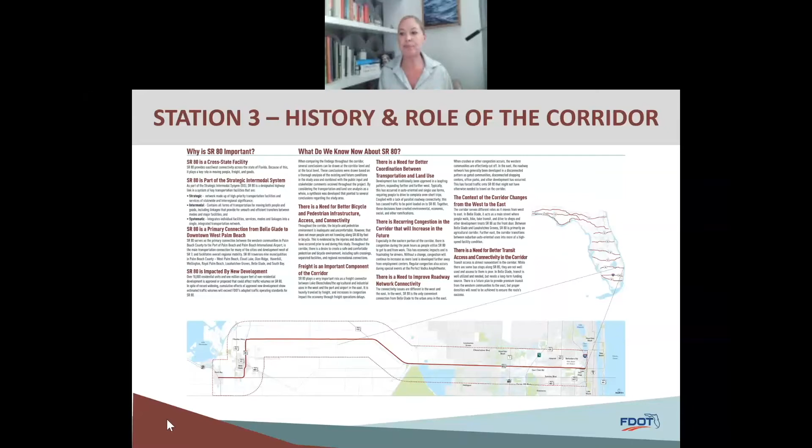So as I was saying, with this being such an important corridor, there historically has been much investment placed on State Road 80. You can see here the extreme makeover. I thought that was really clever marketing for Southern Boulevard. So you can see hundreds of millions of dollars of improvements have been invested since 2005.

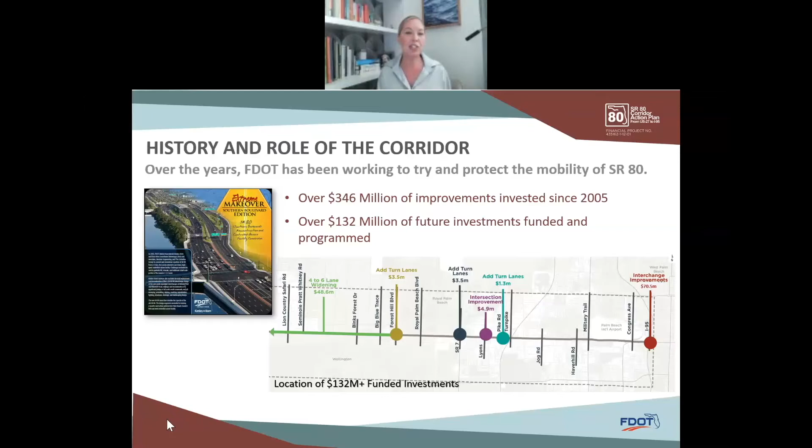There's continuing to be investment made on the corridor outside this study and from this study. So as you can see on the graph below, from I-95 all the way west past Lion Country Safari, there's been investment, as well as over in the Belle Glade area.

So I had mentioned the land use component of State Road 80. This was quite a challenging component of this study because development tends to be all about timing—when you can assume the development in your future forecasts, and also what the development program is. In other words, how many square feet of commercial or how many residential units. For those that aren't familiar, you have to identify all of those specifics so you can incorporate the traffic into your future analysis years to ensure you're properly analyzing what State Road 80 is going to need to accommodate in terms of moving cars and people over time.

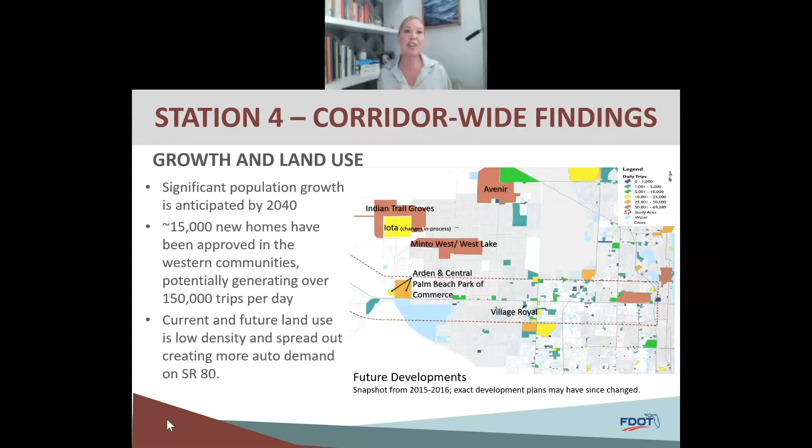For this particular area, you can see it's potentially generating over 150,000 trips per day along the corridor, which is a lot. This was a very big concern to the Department of Transportation, given the importance of this corridor throughout the state to serve and not only move people, but to move goods.

Also, from a land use perspective, we looked at characteristics. You can imagine from Belle Glade to downtown West Palm, those are very different makeups in terms of the land use, the density, the demographics. And in planning, it's so important not to do a cookie cutter approach or one silver bullet solution to all 45 miles. So to make sure the team did not do that, we broke it up into segments, looking at different characteristics. This is now considered and called context classification.

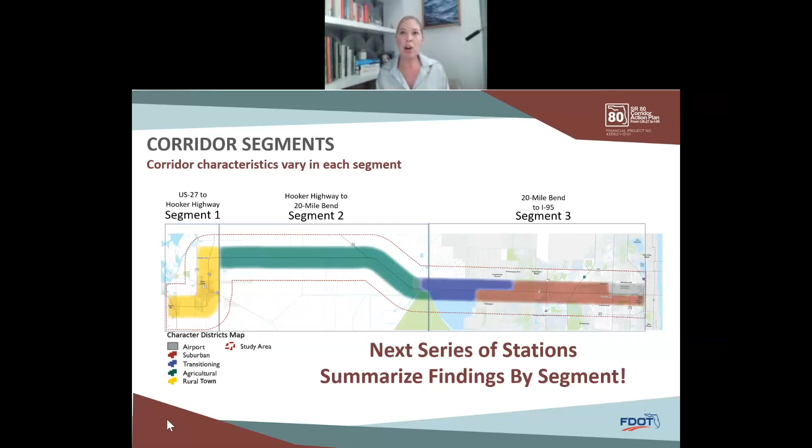So I'm going to walk you through the three segments and our findings for State Road 80. Starting on the west in Belle Glade is segment 1. Personally, this was a very rewarding component of the project because we found a lot of opportunity to improve safety in the Belle Glade area. And it wasn't about widening the roads and getting more cars through—it was truly about helping the community create safer connections and facilities for walking and biking. And that's something we found through the data.

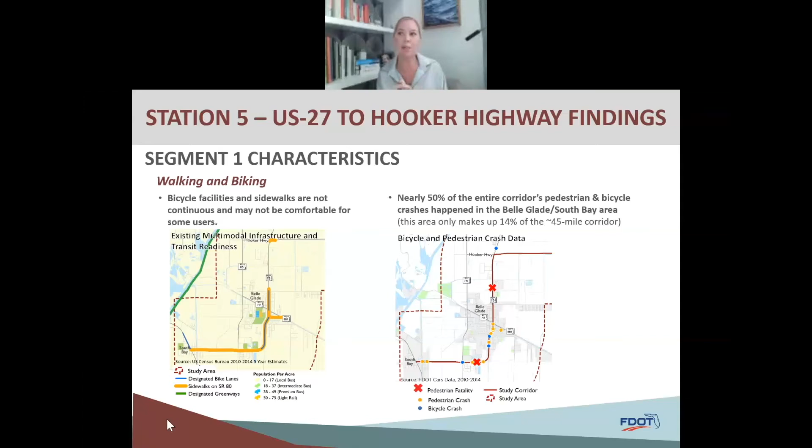So over the 45 miles, you can see that nearly 50% of the entire corridor's pedestrian and bicycle crashes happened in this area. And to us that's just an obvious statistic that we need to invest some safety dollars from a pedestrian and bicyclist standpoint.

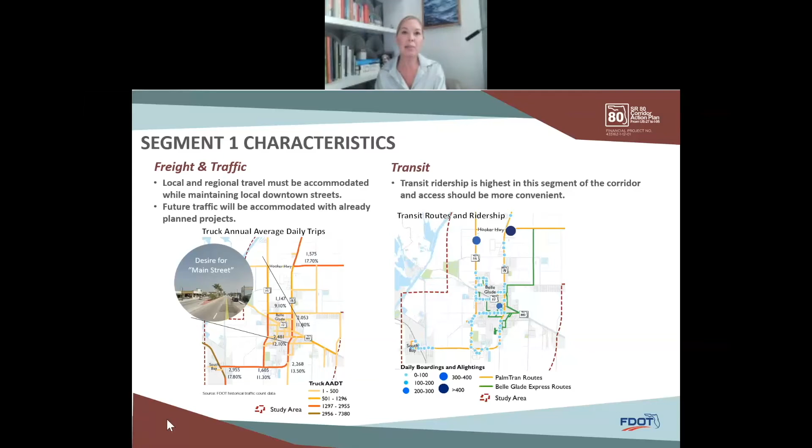Outside of that, we also looked at the freight and traffic components. There's a lot of pass-through freight traffic through downtown Belle Glade, so there's a desire for a main street approach to be considered in downtown Belle Glade. And from a transit perspective, there's a lot of transit ridership occurring in Belle Glade, with folks transferring and heading east into Palm Beach County. So we wanted to make sure we looked at the transit stops and hubs, so folks had good access to frequent transit in the area to get them primarily to healthcare access and employment access to the east in the county.

So how do you take all of the options and narrow them down to what you actually recommend? We had a two-tier process that we applied to each of the 3 segments. The first tier is to develop the long list, throw everything on the table and assess what can be done, then screen those alternatives against the issues and goals you're trying to achieve, identifying what makes best sense to meet your goals and address the issues found through data and analysis.

For segment 1, what did not make the screening was any major roadway capacity changes. We also found that any premium transit, like light rail level investment, wasn't appropriate for the context of segment 1 in the Belle Glade area.

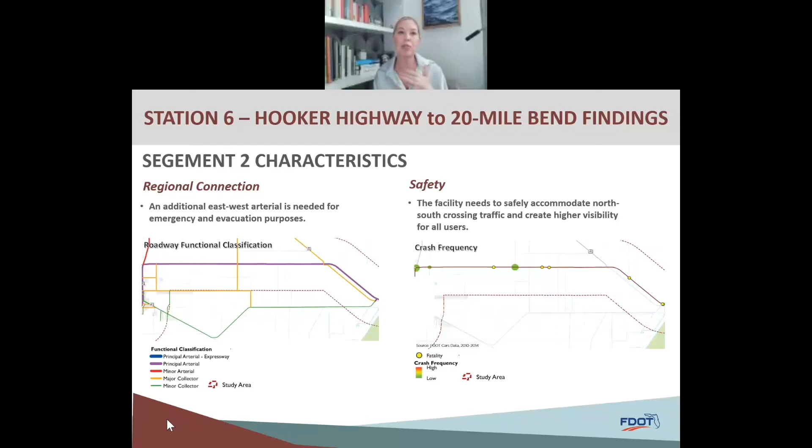From a safety perspective, there's north-south crossing traffic because of the farms out there—people crossing State Road 80 can be in danger because of the speeds. So we noted that those crossings need to be visible and safe.

Again, we went through the tiered screening process. What we screened out as not meeting our goals was roadway capacity changes—we didn't find that this rural area needed added vehicular capacity. Similar to Belle Glade, we also found that the context of this area did not align with any premium transit such as light rail, streetcar, or bus rapid transit.

In terms of what we did identify as strategies: a corridor-wide greenway, which we were excited to recommend because of Lake Okeechobee further to the west. Also a resurfacing and lighting study—there's been years of discussion regarding lighting this area through the State Road 80 farm area. Rehabilitation and maintenance was part of it, and also a safety study.

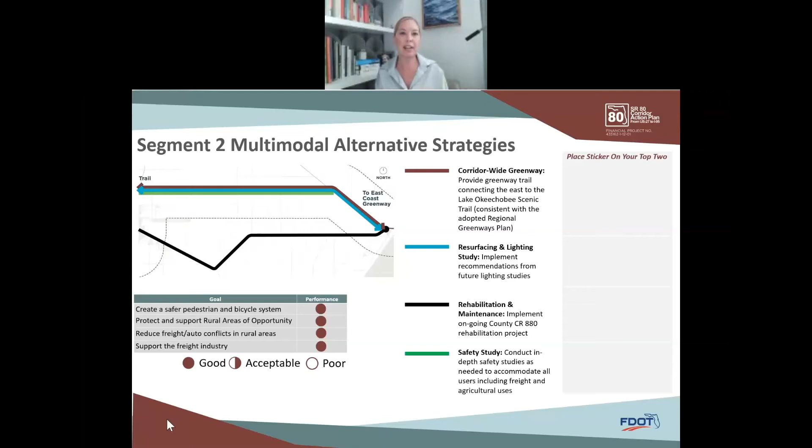Now moving to our last segment, our most complicated segment, which was from 20 Mile Bend all the way to I-95—segment 3. This is where we get into a lot of the congestion issues and lack of network issues that I was mentioning earlier.

We categorized these issues starting with population and employment. Population increases to the west and employment increases to the east are creating more trips on State Road 80. You'll remember we were expecting about 150,000 trips a day into the future on State Road 80—that's getting into highway level volumes.

On the land use and development side, we saw that patterns into the future were continuing to be auto-oriented, which would create more demand. The idea that development coming in would not create these trips was pretty much removed as an option, because it was very clear it was an auto-oriented type of development that was going to continue to occur over time.

I mentioned before the network concern for State Road 80. This on the left is a tool we use to show the effective network. Just because a road exists doesn't mean it's creating opportunities for parallel routes and other ways for folks to get around. A lot of these roads could be dead ends or little neighborhood roads that really aren't meant to carry traffic parallel to State Road 80.

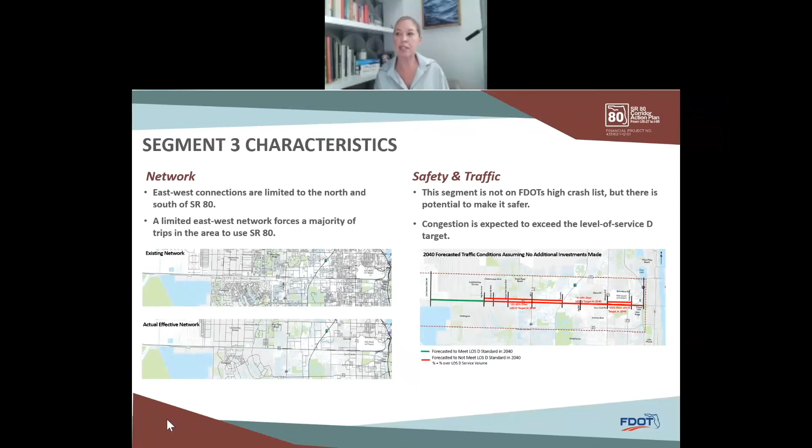From a walking and biking standpoint in this area, 50% of pedestrian and bicycle crashes resulted in a fatality. That was certainly something of concern to us when we were looking through the data and seeing if there were opportunities to drastically reduce that and reduce the severity of crashes occurring, and just try to eliminate the crashes altogether.

From a transit perspective, we did conclude by looking at the land use and densities that this section of the corridor, although the most dense out of the 45 miles, is not ready for premium transit. Premium transit meaning light rail or bus rapid transit, that kind of higher, more expensive transit that runs very frequently, based on existing and adopted land uses. So extreme changes would have to happen for premium transit to be a solution along State Road 80.

The access currently to transit in this corridor, or at least a few years ago, was limited, and we did recommend it be improved upon to create more access.

I didn't note earlier, but there's also a canal running along the south side of this facility. That's another data point that the planners and engineers needed to keep in mind in terms of assessing the issues and solutions, because obviously a canal is a physical constraint when it comes to creating more access along the corridor.

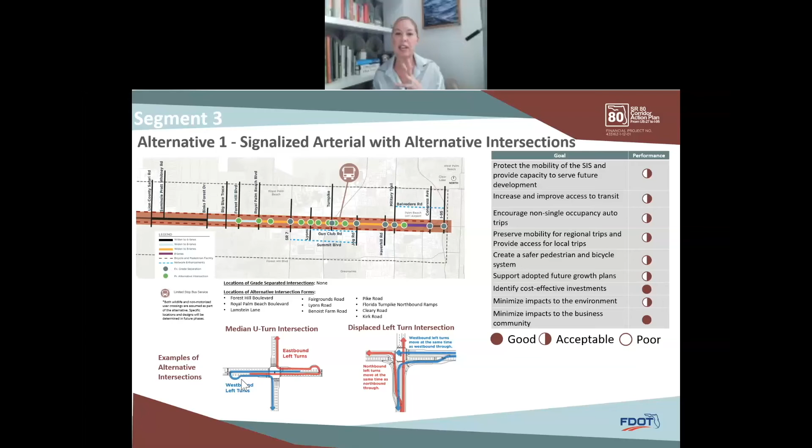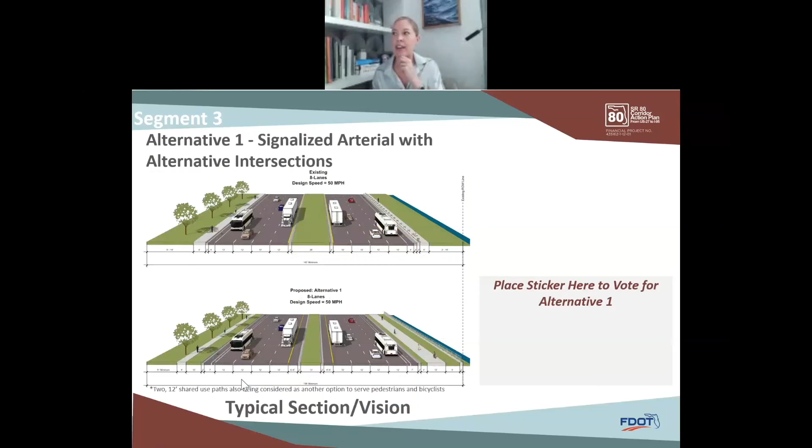Again, the top is the existing typical section, and the bottom would be the proposed, where you'd have a 4-lane main line in the middle.

So those are for your long regional trips, and your frontage roads to the outside to access businesses and communities along the area. Again, here we had to place your stickers if you want to vote for this alternative. I do think, and I'm sure all those on the line that do this work, having these typical sections is very important, and it's very important that they follow the design manuals.

The Florida Department of Transportation does an excellent job creating standards and guidelines so there's a consistent experience. It's so important in the planning phase to properly follow those manuals, because when planning is done, it goes to the engineers and designers. If it's not thoughtfully brought into the planning process, you can hit a lot of barriers and challenges.

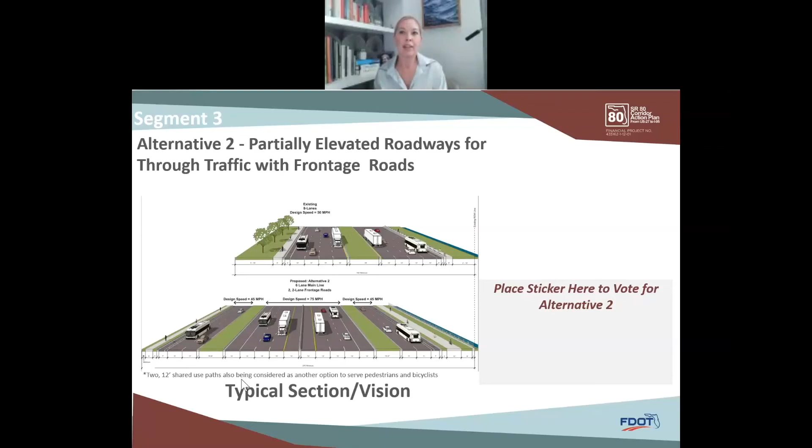And you can really lose the momentum of moving a project forward if these standards aren't respected and thought of through the process. Since this study, the design manual has undergone a lot of changes, and a lot of great changes to accommodate all modes better and create slower speed options. It's exciting to see what the department's doing with their design standards. But I just wanted to note that this was a really important piece, accounted for and really respected by the engineers in the process.

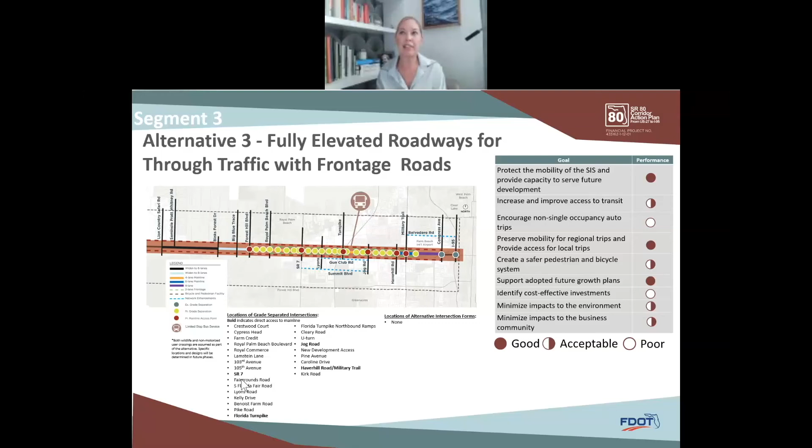So the last alternative is alternative 3, fully elevated roadways for through traffic, creating that main line with frontage roads. Here you see the list of grade separated intersections is longer than the partially elevated. You can see it does perform better than alternative 2. There are fewer poor grades, if you will, on the performance, and you get several good full circles on this one as well.

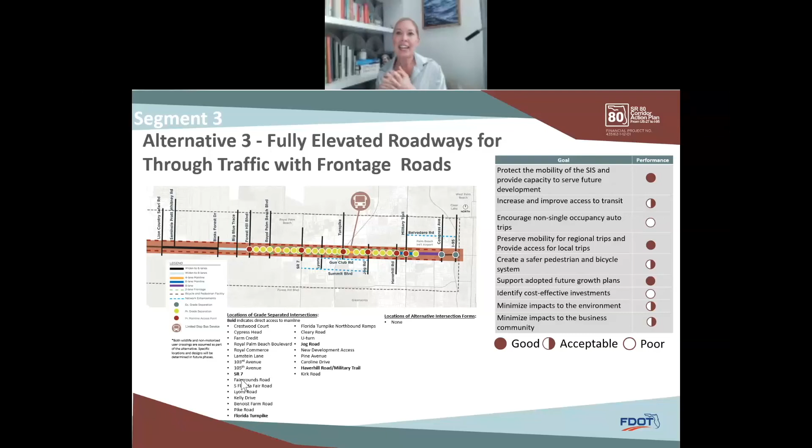It really achieved the mobility, preserving that regional trip on the state strategic intermodal system facility, and just keeping access also for the local trips. It had less impact from a right-of-way perspective. This is the visual of the fully elevated roadway, and this was controversial because some people don't want essentially a new highway, but some people really did.

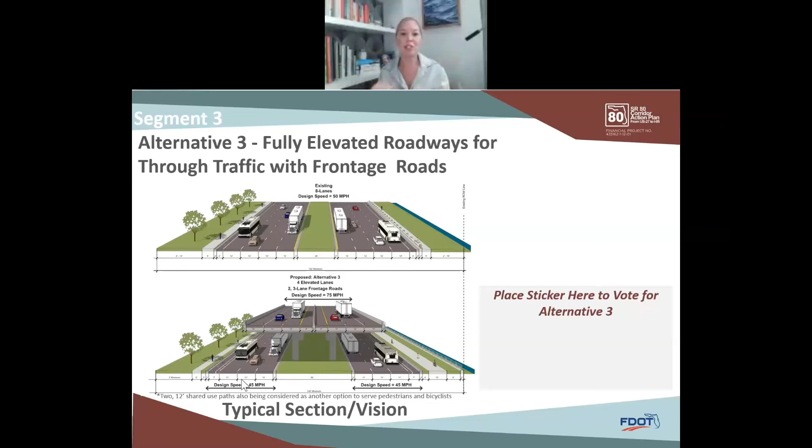But as you can see, it was our job on the consultant side to give options, starting from minimal impact but maybe not providing much more capacity in alternative 1, all the way to alternative 3, where you're providing a lot more capacity. It's pretty expensive, but it also has less right-of-way impacts. And then alternative 2 is somewhat in between. So a very wide range.

And transit was always important throughout the process. So even though premium transit really wasn't appropriate for this area, we came up with what we're calling the West County Bolt. I'm not sure how this has moved forward past this study. I haven't spoken to Palm Tran about it in quite some time, but we were just wanting to make sure transit remained part of this. And I did hear that transit improvements were accommodated in the Belle Glade area, which I think is just great to hear. A lot of hard work went into that, so I applaud the folks that were able to get that done.

And since this study, the Palm Beach TPA has done a significant amount of work working with the county and FDOT in developing a countywide 561 plan that has several transit routes beyond the Southern Boulevard. So I think this really helped spark a countywide discussion on transit needs, and acknowledging that maybe Southern Boulevard isn't our primary premium transit corridor, but that it is desired to not continue building highway style throughout. And really, what part do we all play in creating this multimodal county? Because it's not all on FDOT, it's not all in the county, it's not all in the TPA, it's not all in the cities. We really all play a role in developing and forming what our system looks like over time.

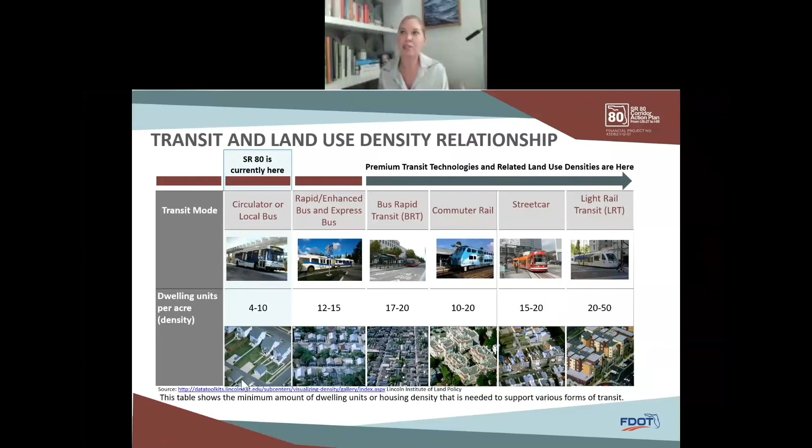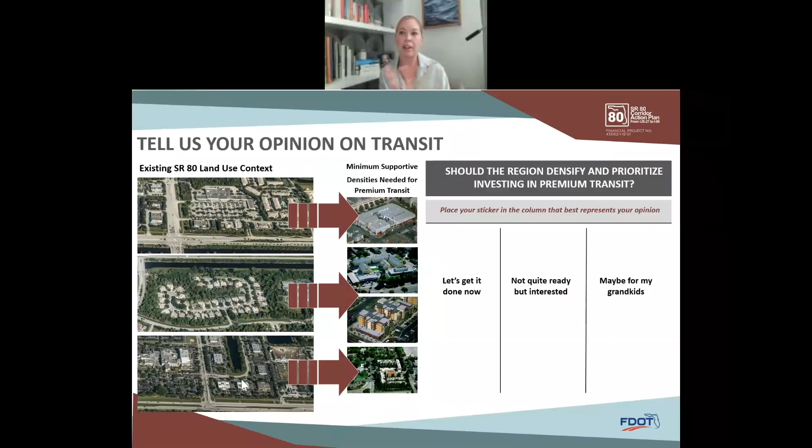And then we were, through this process, wanting to hear folks' opinion on if they supported changing the land use. Because again, throughout the process, there were differing views and differing approaches. So we wanted to hear from the community what they were ready for in terms of land use changes and getting away from more rural suburban and getting into more transit-supporting densities.

So that was the whole workshop we walked through. There was a ton of engagement, a great turnout. I'm really proud of everyone involved. I know everyone had different preferences on what the solution should be, but I think great discussion came from this study.

And I was curious to hear from you guys which alternative you think the community selected as their preferred alternative on segment 3, that last segment. So if you could put in the chat box if you think it's alternative 1, 2, or 3, if folks are still there, if I haven't lost everyone. Alternative 2, 1, 3. Give just a few more.

So it was actually alternative 3. Alternative 3 was what was selected because, one, the community did put the most stickers on alternative 3. And from the DOT's perspective, since they can't control land use and make all those changes, they had to really think about the future of moving freight and goods and people through the corridor without purchasing so much right of way and impacting the businesses along the way. So alternative 3 kept the footprint not as wide while still providing that additional capacity that's needed because of the land use decisions and growth that's coming to South Florida.